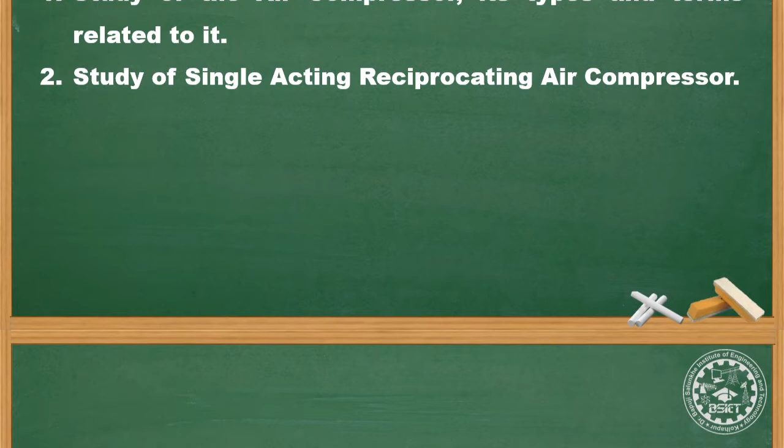Starting with first, air compressor. An air compressor is a machine which sucks low pressure, low temperature air from the atmosphere and compresses it to high pressure, high temperature by reciprocating motion of a piston or by rotary motion of blades in a casing. It is a work absorbing machine driven by an external source.

The air compressor is nothing but a device which sucks low pressure, low temperature air from the atmosphere and converts it into high pressure and high temperature using an external device by means of a reciprocating piston or by rotary motion. The compressed air can be used for n number of applications which are generally used nowadays.

Following are some applications of compressed air: for filling the air in the tube of the vehicle, that is, filling the air in the tires of vehicles; in automobile service stations to clean the vehicles; for spray painting in paint industries; in a vehicle to operate brakes. Some brakes operate over the air and are called pneumatic brakes. For cleaning the workshop machineries, for cooling large buildings, for supercharging of an IC engine.

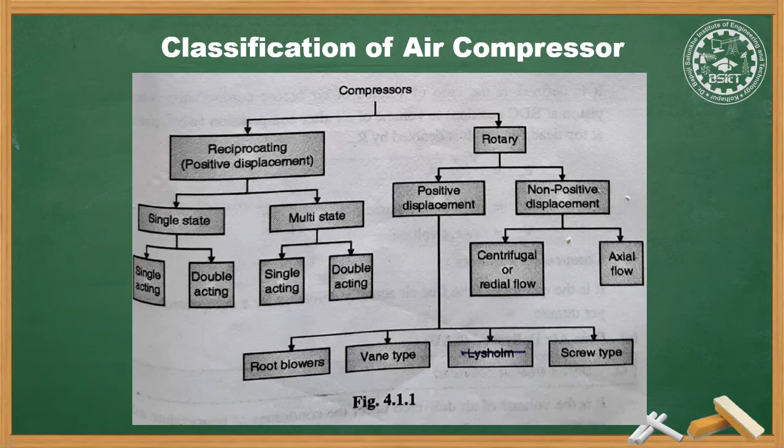Air compressors are also classified according to capacity, that is low capacity, medium capacity and high capacity compressors; according to the pressure limit, low pressure, medium pressure and high pressure compressors; and according to the driving unit used to drive the compressor, that is direct drive, belt drive or chain drive compressors. So these are the classifications of an air compressor.

Before moving further, let us understand some terms related to the air compressor. The very first is compression ratio. Compression ratio is defined as the ratio of volume of air before compression, when the piston is at BDC, that is bottom dead center position, to volume of air after compression, that is when the piston is at TDC, top dead center position. It is denoted as Rc and is given as Rc = (Vs + Vc) / Vc, where Vc is clearance volume and Vs is swept volume. Compression ratio is defined as the ratio of volume of air before compression to volume of air after compression.

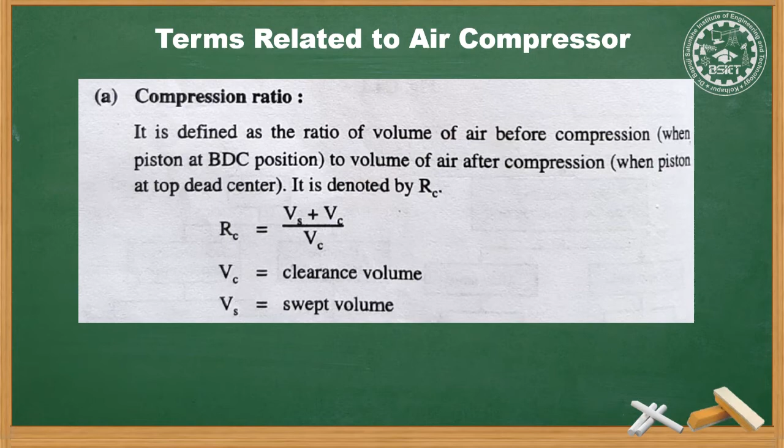Next term related to compressor is compressor capacity. Compressor capacity is the quantity of free air actually delivered by the compressor in meter cube per minute. The quantity of air delivered by the compressor in meter cube per minute is called compressor capacity.

Third, free air delivery, also known as FAD. FAD is the volume of air delivered under the conditions of temperature and pressure existing at the compressor intake, that is, the volume of air delivered at surrounding air temperature and pressure. Free air delivery is nothing but the volume of air delivered at surrounding air temperature and pressure.

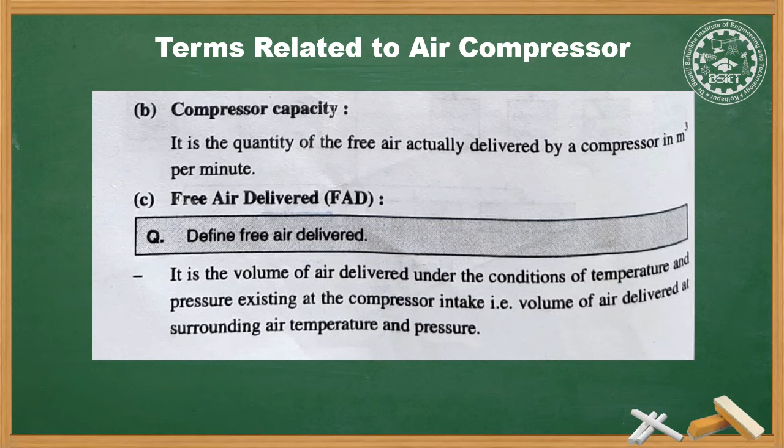The next term related to air compressor is swept volume. The volume displaced or swept by the piston when the piston moves from top dead center to bottom dead center. It is also called stroke volume and it is denoted by Vs. Swept volume is given by area of piston into stroke length, that is Vs = π/4 d² × L, where d is the diameter of piston and L is the stroke length.

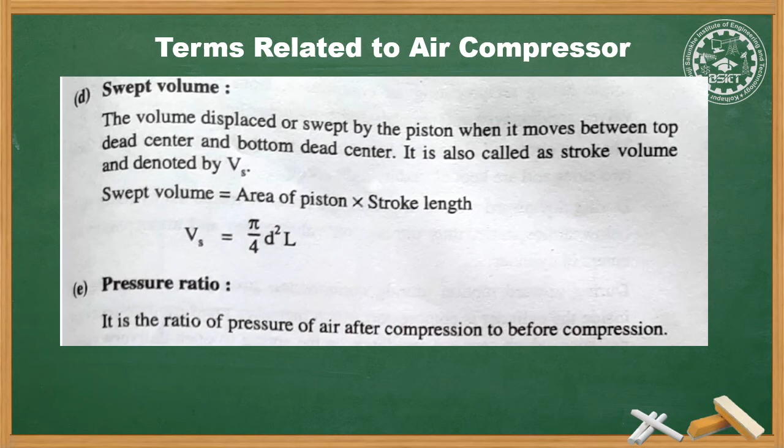And the last is pressure ratio. Pressure ratio is the ratio of pressure of air after compression to before compression. So these are some terms related to air compressor.

Starting with reciprocating air compressor. Reciprocating air compressors are called positive displacement compressors because they displace a fixed amount of air, that is, the discharge of air is constant. The figure below shows the principal parts of a reciprocating air compressor. These are the same as that of an IC engine. The figure shows a sectional view of an air-cooled single-stage, single-acting reciprocating air compressor.

Both suction and delivery valves are disc type and are operated automatically. They are opened and closed by the difference in air pressure acting on their two sides and are kept closed by light springs. During the downward motion of the piston, the pressure inside the cylinder falls below atmospheric. Thus, the suction valve opens and atmospheric air enters the cylinder.

During the upward motion, that is, the compression stroke of the piston, the air inside the cylinder is compressed, which increases the pressure above the reservoir pressure, which overcomes the resistance of the spring to open the delivery valve, and discharge takes place from cylinder to receiver. The receiver is a closed vessel and acts as a storage tank.

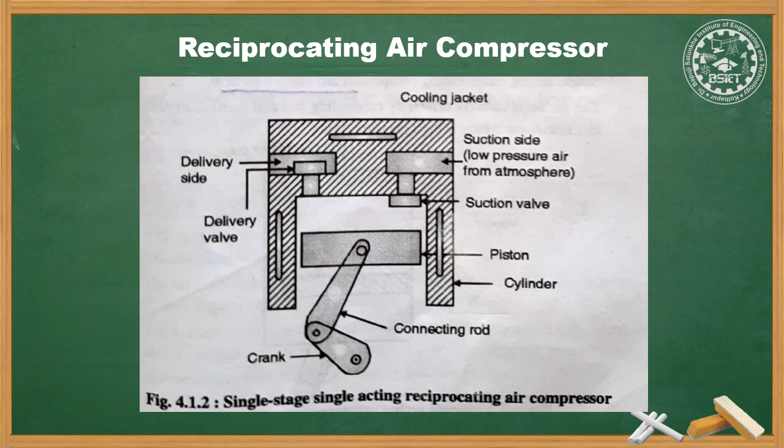The compressor is driven by an external source. Sometimes it may be an electric motor, sometimes a power prime mover, sometimes an IC engine. The prime mover will have to supply very high starting torque. To avoid this, a hand unloader is used for releasing pressure from the compressor cylinder when the compressor is stopped. So this is how the single acting reciprocating air compressor works.

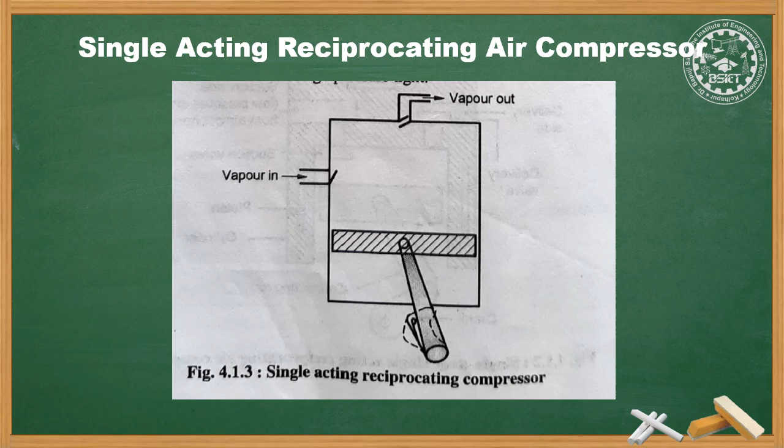Single acting reciprocating air compressors, as shown in the figure, are always vertical. The piston is directly driven by a connecting rod and crankshaft enclosed in a crankcase, which is pressure tight. There is only one delivery of high pressure air for every revolution of the crankshaft. It requires less floor space for installation. The power or the air obtained is low as compared to a double acting reciprocating air compressor.

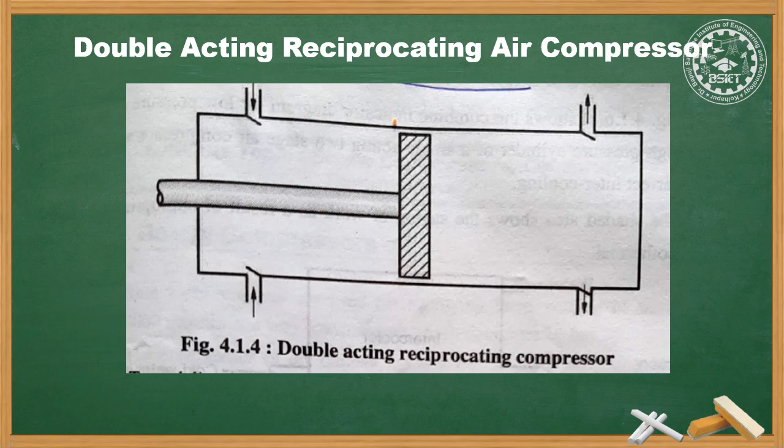Double acting reciprocating air compressors, as shown in the figure, are always horizontal. Two deliveries from both sides of the piston for each revolution of the crankshaft can be obtained in a double acting reciprocating air compressor. This compressor requires more space as compared to a single acting vertical compressor. Both sides of the piston are exposed to rapid change in temperature and pressure. There is a chance of leakage in this type of compressor. A large stuffing box is used to prevent the leakage. It is heavier in size and requires a lot of maintenance and proper handling.

So this is it for today's session. Today we have completed the first point of the fourth chapter, air compressor: what do you mean by air compressor, its applications, types of air compressor, single acting and double acting reciprocating air compressor.